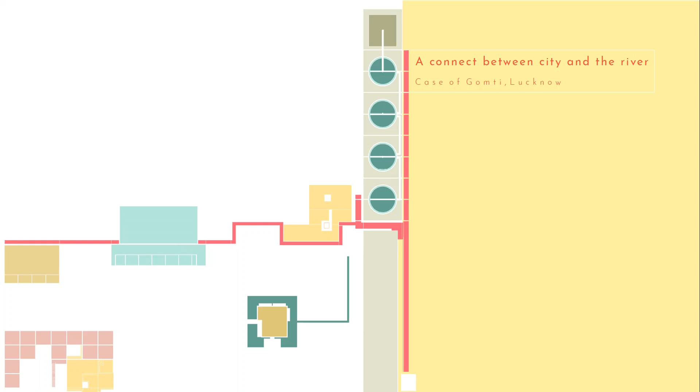Between city and the river, case of Gomti, Lucknow. My thesis began with observing the river, its edge, and relationship to its city.

The role of the river in cities has changed over the past years. From being significantly important to the cities, they have reduced to become mere entities to release pollution. The modern approach of developing most river edges comprises creating a hard concrete edge, thus being insensitive towards the changing nature of the rivers. Also, these edges create a stark disconnect between the city and the river.

The investigation started with considering how, in a highly urbanized city, the role of the river and its quality deteriorated over a period of time, and how the river has become a mere dead corridor with no relationship to the city.

The intent here is to share with the public the potential role of the river in reviving its quality and relationship with the city and its people.

The thesis also aims to make an impact at two scales: at macro level, by contributing to the cleaning of Ganga by improving the quality of its tributary Gomti, and at micro level, by providing public spaces along with the treatment infrastructure to re-establish a connect to the city.

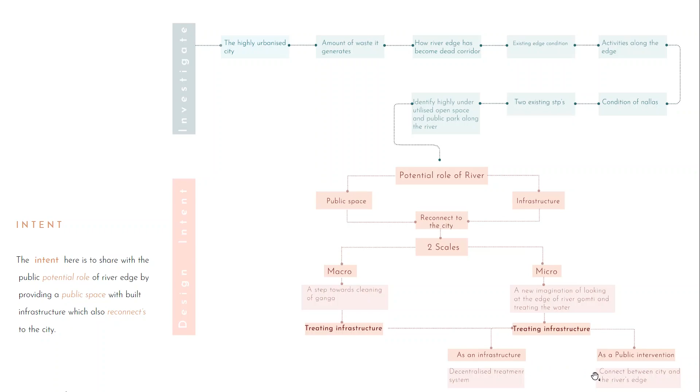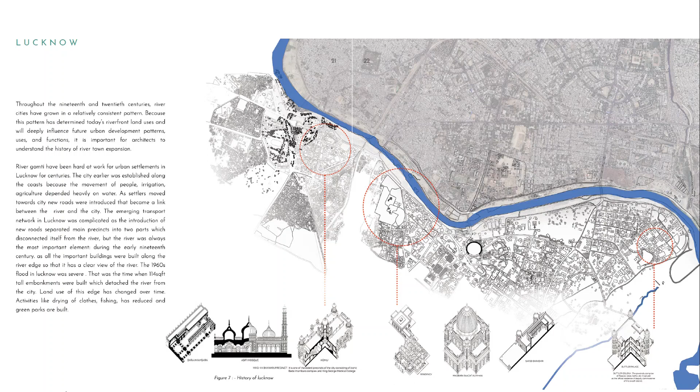Lucknow city has had a very strong connection to its river since the olden times. River Gomti has been of significant importance to the city for the development of all historic buildings, celebrations, and various other events during the past years.

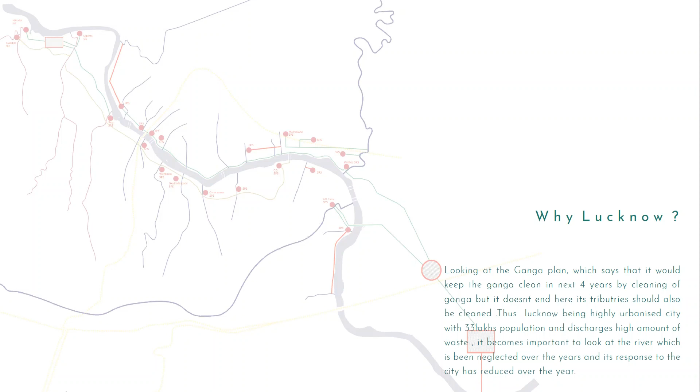The river of Lucknow has been a major contributor towards the waste released into the river Ganga. Lucknow, being a highly urbanized city, also aims to contribute towards the cleaning of river Ganga. To do so, it becomes important to clean the water at its source before being released even into the tributaries. Thus, River Gomti of Lucknow becomes the starting step in the direction of cleaning Ganga.

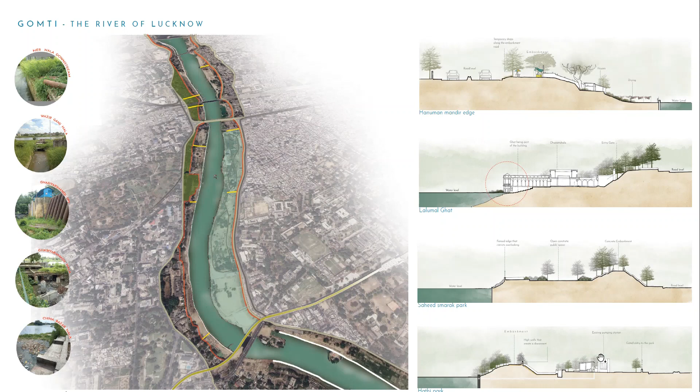The current state of the river Gomti is that it is bounded by an embankment that was created to prevent flooding into the city. This has led to complete disconnect of the river from its city. This section alongside clearly shows how the embankment has become a physical as well as visual barrier between the river and the city.

These are few activities along the edge of the river as observed on site: vendors occupying space to sell products, land used for agriculture, washing, bathing, etc. Few of these activities have been taken up to derive program for the intervention.

Coming to the existing treatment infrastructure of the river and their current condition, there are 26 nalas along the edge that open up into the river. Currently, the system of treatment is centralized with just two STPs, each located at the extreme end of the city. The capacity of these STPs is highly insufficient and their condition is very poor.

A new approach of treatment is imagined by decentralizing the entire system. Multiple STPs would be placed strategically along the river. These prototypes would be placed next to the nalas, where water just gets treated before it enters the river.

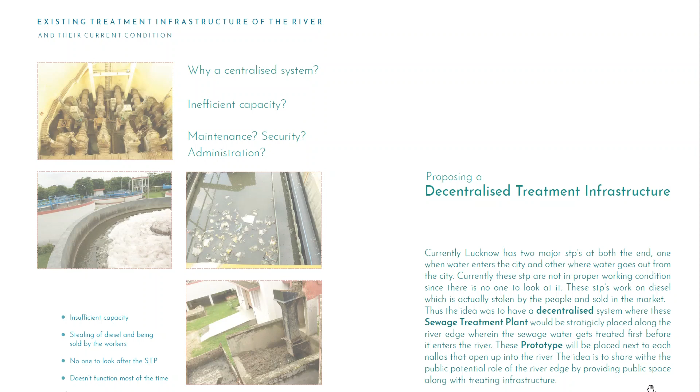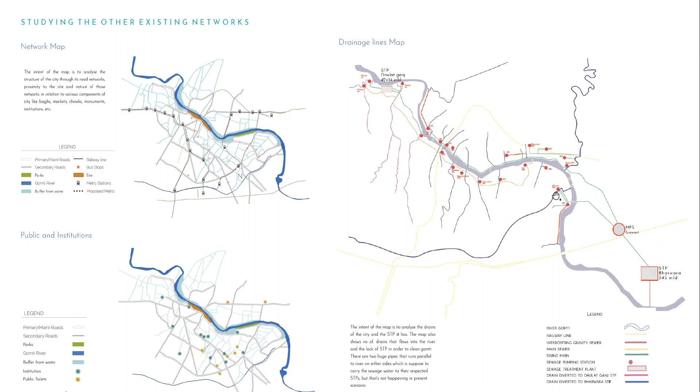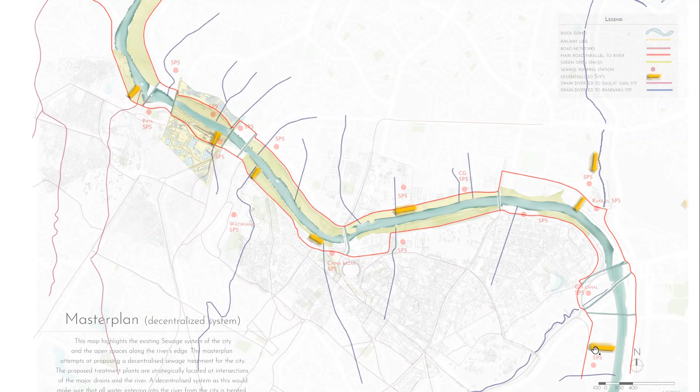The proposed treatment plants are strategically located at the intersection of major drains and the river. A decentralized system as this would make sure that all the water entering into the river from the city is treated.

The location plan shows the area of study, demarcating various underused parks on the site. The river divides the city into two parts, one which holds the important historical monuments and ghats along its edge, while the other is newly developed edge.

Two potential sites are identified: A, Gautam Buddha Park; B, Shaheed Smarak Park, of which site A was selected since this park houses a sewage pumping station within it and two nalas passing through it. This park also has some existing water bodies that can be used in the course of intervention.

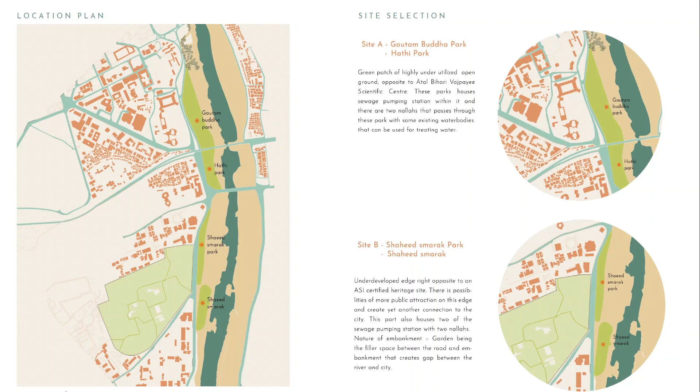The program has evolved in three parts: activities as connect, events as connect, and space as connect. Activities as connect includes the bathing and washing ghats, space for growing crops, and washing clothes.

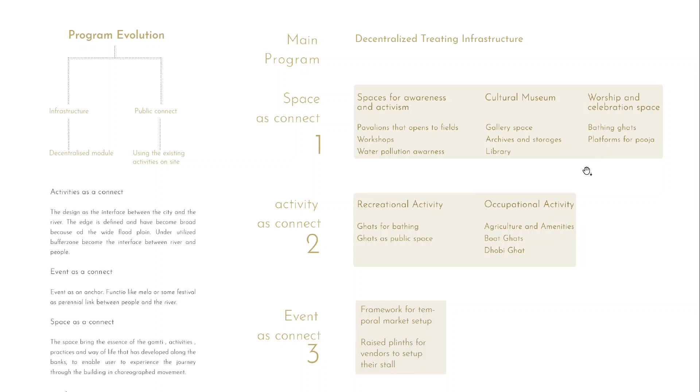Events as connect includes the framework for temporary market setup and the raised plinth. Space as connect includes the workshop, water pollution awareness, gallery space, bathing ghats, and place for performing puja. And the main program is the decentralized treatment infrastructure.

The site plan shows the immediate context of the selected site. This is the MG road that leads one to the Bada Imambara and the Rumi Darwaza. Opposite to the site are other important structures like Atal Bihari Vajpayee Scientific Center, Lucknow Management Association, Sardar Patel Hostel. The plan shows how the intervention sits on the site and its ease of accessibility.

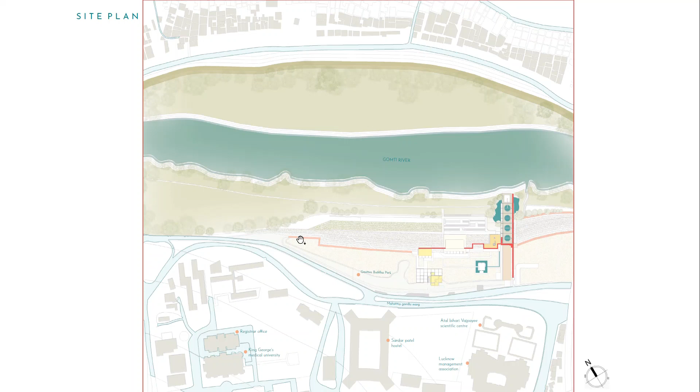Also, the red demarcated line is the embankment. These diagrams show how the objects have been laid on the site to make it more public in nature. They also show the various steps taken for arriving at the orientation of these objects.

The embankment creates a visual disconnect between the city and the river, and the parks add an additional buffer. The compound wall restricts accessibility to the other side of the river. So removing the compound wall and making the space more public, laying the axis on the site generates more public along the edge, and reactivates the embankment by adding public function.

Introducing the decentralized treatment system along the Nala allows the public to view the system, making it a delight for the people. Inserting public functions that support the main building, the STP becomes the backdrop for those buildings. In addition, the ghats for the people to bathe attract the people to the other side of the embankment.

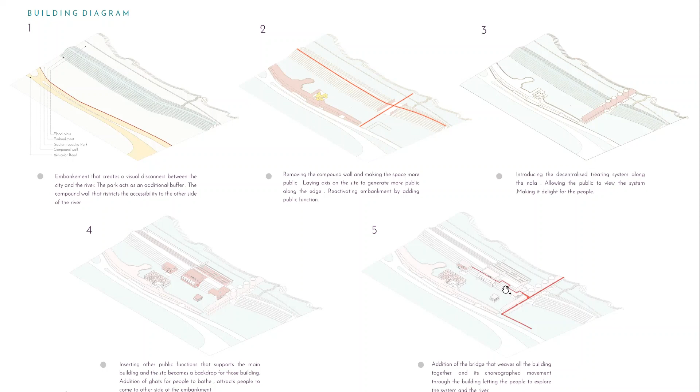Addition of the bridge weaves the building together and its choreographed movement throughout the building lets people explore the system and the river.

These are the process models.

The main treatment infrastructure is laid perpendicular to the river and cuts and acts as a dominant magnet that attracts people towards the river edge.

The public toilet next to the STP connects to the other side of the embankment. These objects, toilets, gallery space, and wood workshops are tucked into the embankment, allowing more public towards the river.

On the bottom of the site is a temporary market setup, raised with a raised plinth for the public to set up their stalls and market. Going towards the right of the plinth is the RO treatment object that purifies the water and brings it to the level of drinking.

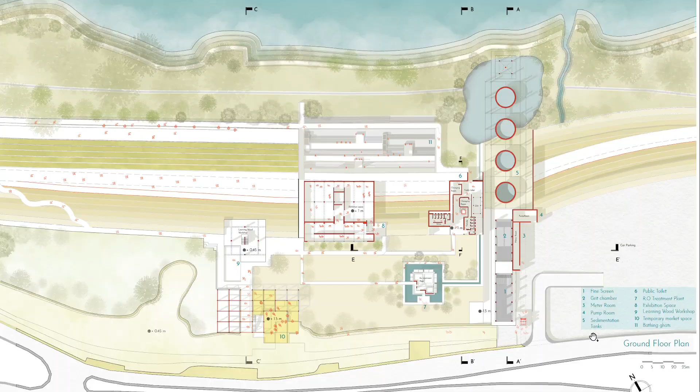The journey of the person starts from below and takes you to the upper floor plan. The bridge that takes you to the end of the STP also connects all the objects, allowing one to explore the site. One sees the rotating panel while walking along the bridge on the first floor.

There are offices, staff rooms, a cold storage space for storing chemicals, and the ghats for bathing, washing, and performing rituals.

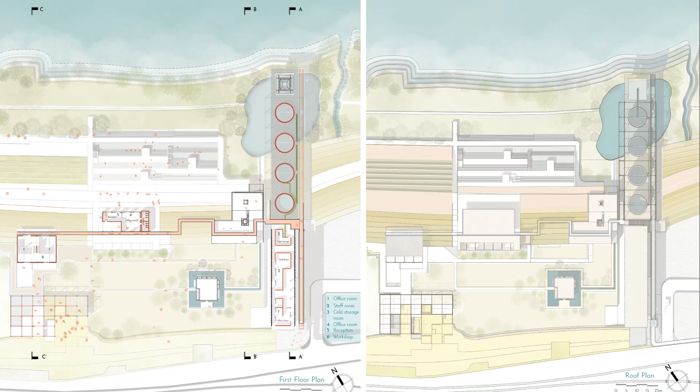That's the roof plan on the right. Now I will get into explaining the detail of each object.

The sewage treatment plant is imagined to be a machine that cuts through the embankment. The material for the object is chosen strategically. The part of the structure towards the river is kept at its lightest. Concrete is used in the part towards the city side of the embankment.

Towards the river's edge, the concrete silos are lifted above the ground. An exoskeleton is introduced that holds the silos in place. The process of purification is exposed through the transparent pipes, which becomes a viewing delight for the public.

The clarifier at the end with constant water flowing through its facade is imagined almost as a magnet that attracts the people to the end of the machine.

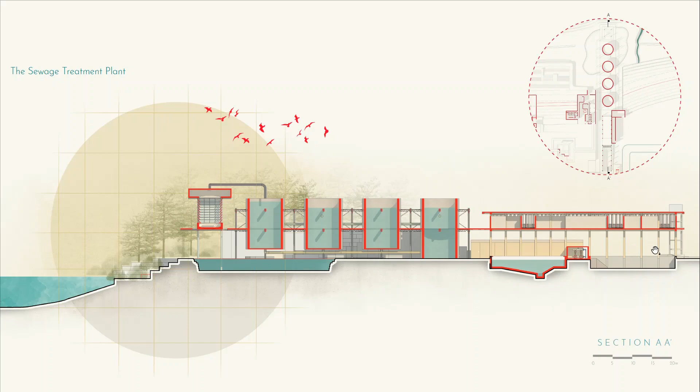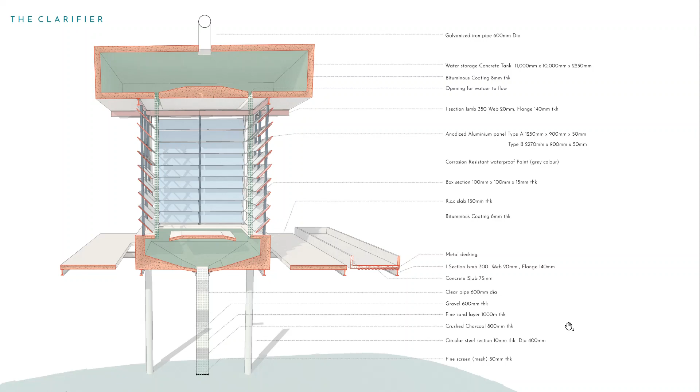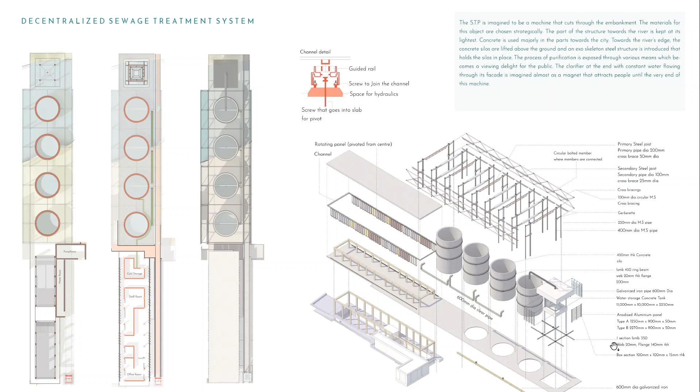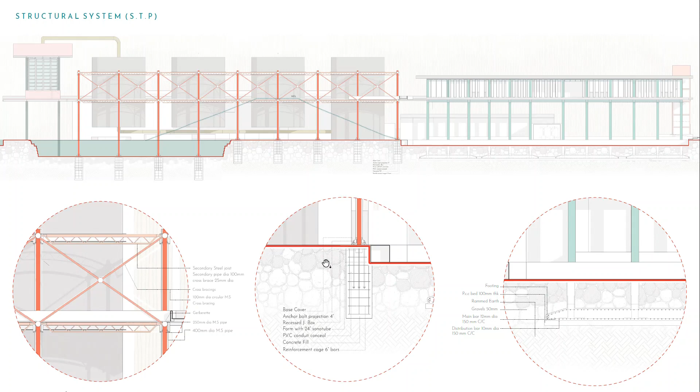Below are the detailed views of the structural system, the exoskeleton system, the foundation system for the steel, and the concrete foundation system.

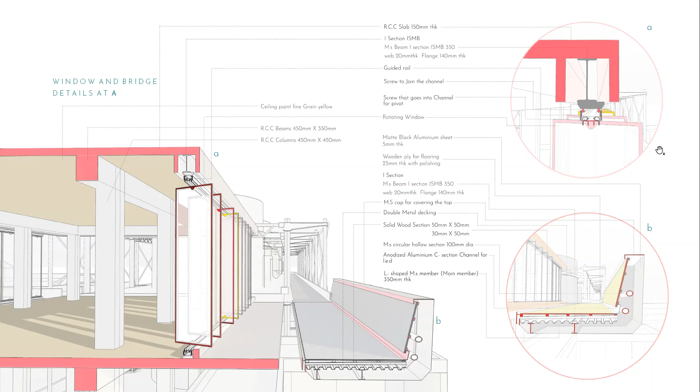The public toilet extends into the embankment since part of the structure is on the other side of the embankment towards the floodplain. Its organization is planned keeping in mind the swelling of the river.

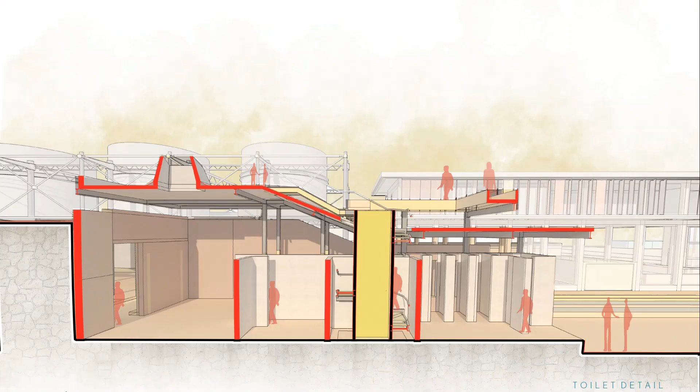A single narrow opening is provided towards the ghat that can be cordoned off during the swelling of the river. An RCC frame structure with I-section reinforcement is used. These I-sections extend beyond the wall to support the roofing system, leaving a slit for light and ventilation.

A skylight is provided in common areas to bring in natural light while maintaining the privacy of the space. The form of the roof is designed to maintain the line of the embankment. The central staircase block cuts through the roof, making it accessible for public viewing purposes.

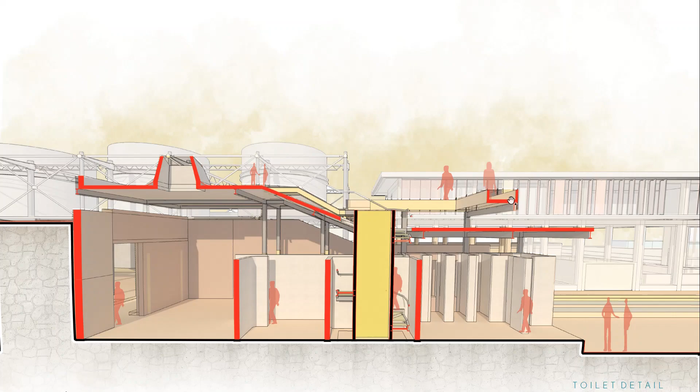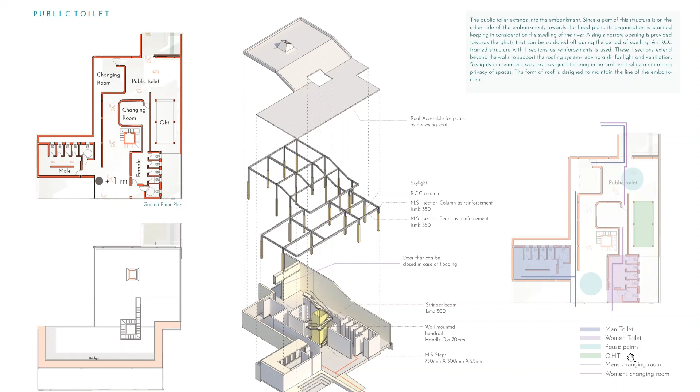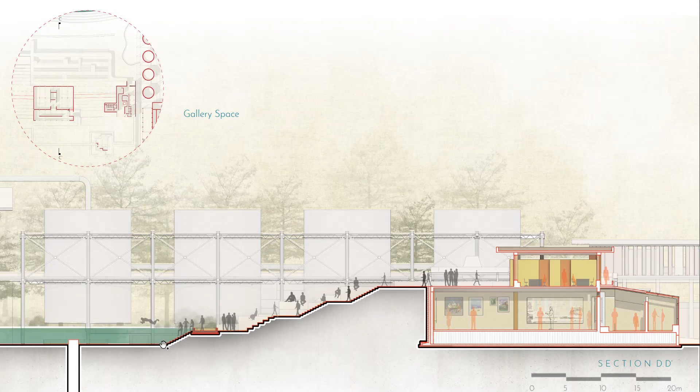A portal-like structure is introduced as transition space between the main exhibition and the exterior. This can also be used as a space to conduct exhibitions of a comparatively informal nature. The roof of this object becomes a part of the embankment, which is also used by the public to access the ghats and the STP, which acts as a backdrop to the object.

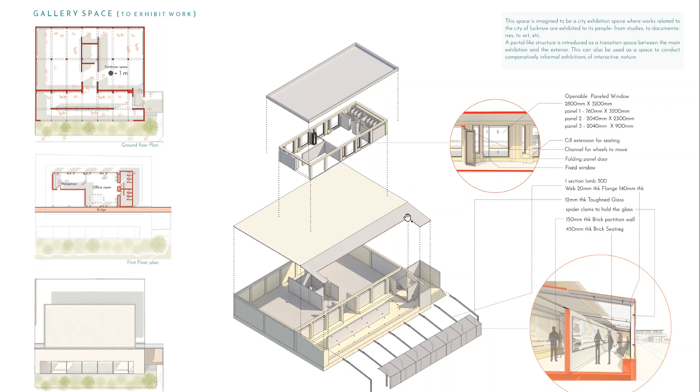RO treatment plant. The object is where the final process of ultrafiltration of water takes place, post which it is safe enough to be used for drinking.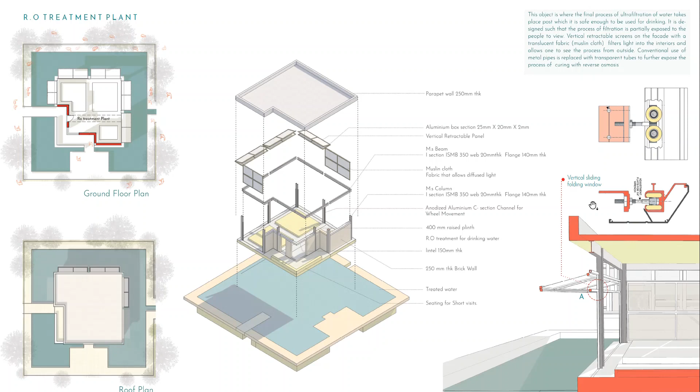Learning wood workshop. A part of the stretch of the river's edge is used in quite a few interactive activities like wood workshop, exhibition and sale spaces, and market setups. These activities have been incorporated into the project as a catalyst to create a connection to the public.

A wood workshop for learning woodwork skills is on the upper level, with exhibition and sale space on the lower level, planned with a central staircase core and only four columns touching the ground. The ground level is designed to be light and adaptable in nature.

An extended plinth becomes a spill-out space for the exhibition. An exposed steel frame that extends out of the roof provides for a viewing space. The idea of an elevated roof allowing for light and ventilation is used in all objects throughout the site.

This is the exploded axonometry of the Learning Wood workshop, which shows the staircase detail and the exposed steel frame on the roof.

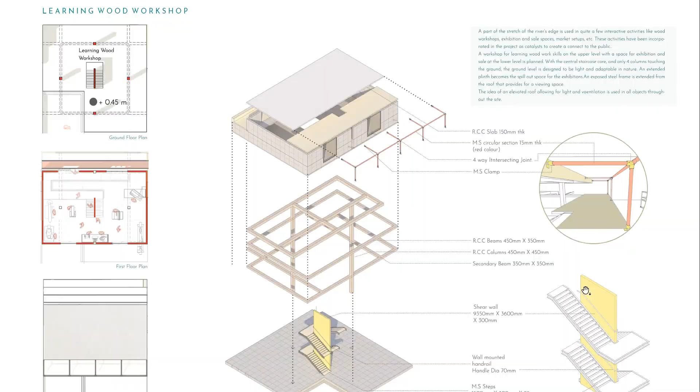This is the complete axonometry to understand the site, to understand the whole building, the idea of the building. It shows the journey of a person who enters the intervention from the elevator and moves along the bridge to explore other objects. It shows how spaces like temporal markets are occupied by sellers and the wood workshop where furniture is exhibited. On the top are the exploded axonometries of all the objects.

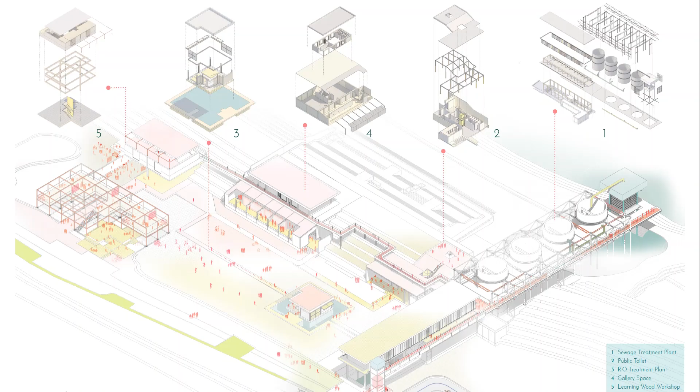This is the water movement diagram, which shows the sewage line from the city entering into the septic tank, which further goes into the fine screen and the grit chamber where waste is separated from water, which further goes into the primary tank, the aeration tank, the secondary tank.

Sedimentation tank for further purification of water. After passing through the clarifier, the water is released into the river, but some part of the water is again pumped back into the site, into the RO treatment plant, where the water is purified to the level where you can drink it.

The detail of the clarifier, the sedimentation tank, the fine screen, and the septic tank.

On the right is the diagram that shows the swelling and contraction of the river throughout the year and the seasons. With the changing volume of the river, the activities along the edge also change. The project attempts at allowing such temporalities to exist.

The first view is during summers when the river is in contraction. During winters the river swells a bit and covers the floodplain, and during the monsoon, which is the high flood line, it goes up to the ghats, and the activities change according to the seasons.

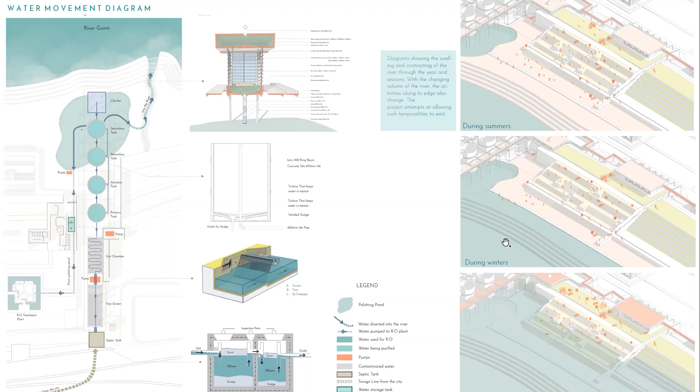View from the RO treatment plant.

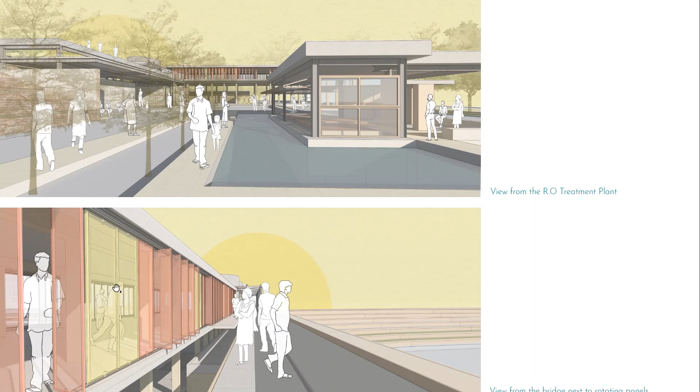This is the view from the bridge next to the rotating panel. It clearly shows the transparency of the panel that you can see in.

Sewage treatment plant requirements and calculations.

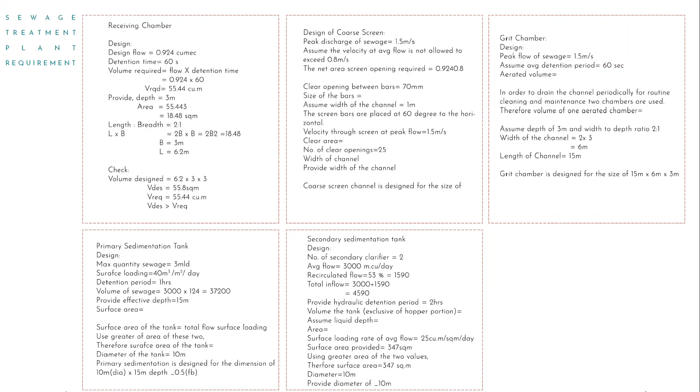This is the complete axonometry of the site. Thank you.